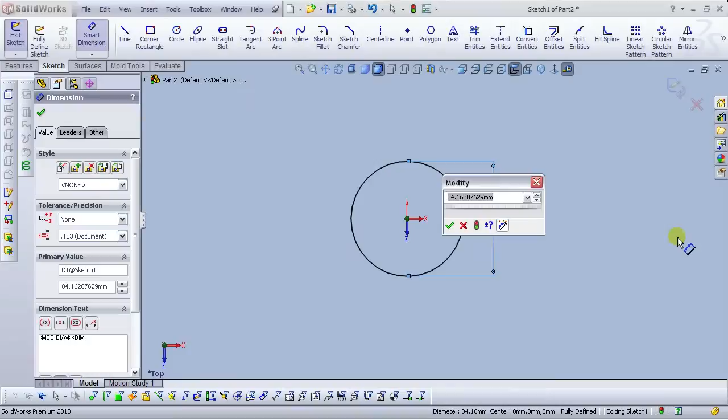Okay, let's start by opening a new document and creating a new sketch. Select the part and select OK. Go to the top plane and open a new sketch. Select the Circle tool and let's draw a circle from the origin. Okay, now let's smart dimension this circle. For diameter, type 70 millimeters.

Go to isometric view and exit the sketch. Go to Extruded Boss/Base. For the depth, type 80 millimeters and select OK. Now let's add a fillet. For the fillet radius, type 5 millimeters, select this edge here and select OK.

Go to the Shell feature. In parameters, for thickness, type 2 millimeters. Select show preview, select this face here and select OK. Okay.

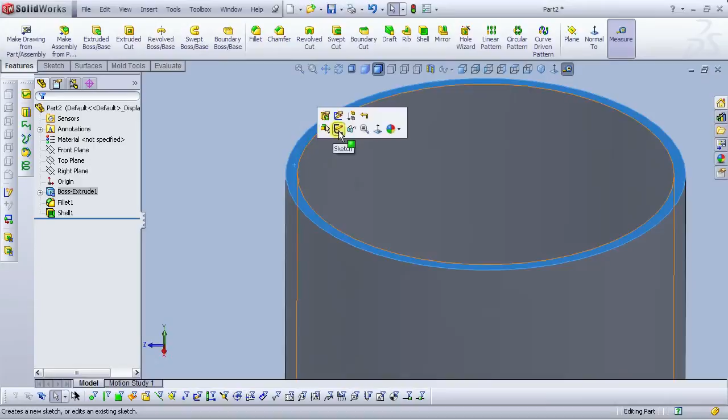Now go to the right plane. But before that, let's open a new sketch. Select this face here and let's open a new sketch. Select circle and from origin let's draw a circle about here. Okay, now let's smart dimension the circle and type 69.5 millimeters. Okay.

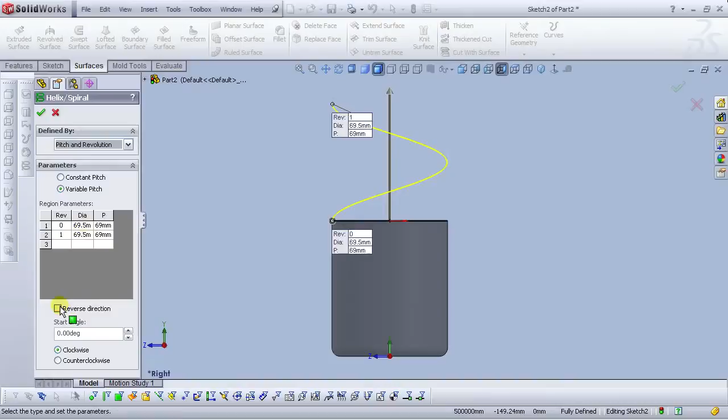Now go to the Surfaces tab, select Curves and go to Helix and Spiral. Go to the right plane. Okay, select variable pitch and pitch and revolution. Okay, select the reverse direction checkbox and for start angle type 0.

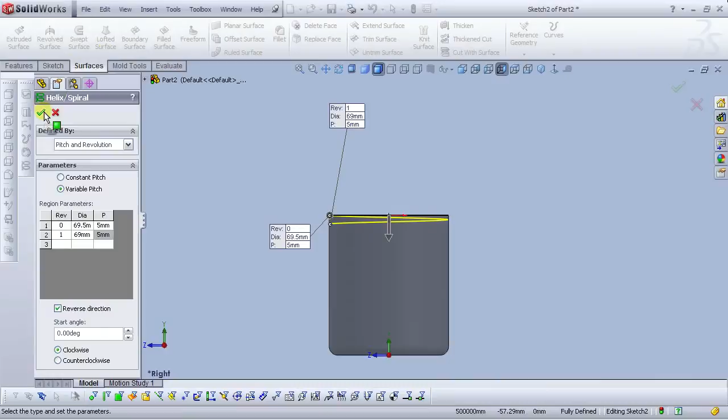Okay, now in parameters, for the pitch type 5. For diameter type 69 in the second row. Okay, and also here type 5. Now it looks good. Okay, and let's select OK to accept. Now we have our spiral.

Go to the right plane. Now let's draw a sketch. Select the right plane and open a new sketch. Let's draw a circle. Let's smart dimension the circle. Type 1 millimeter in diameter. Now let's draw a line from this point here to this point here.

Okay, let's trim. Select the Trim Entities tool, trim this side of the circle and select OK. Now select this point and this helix holding Control and add Pierce. Okay, looks good. Now go to the Features tab and let's exit the sketch.

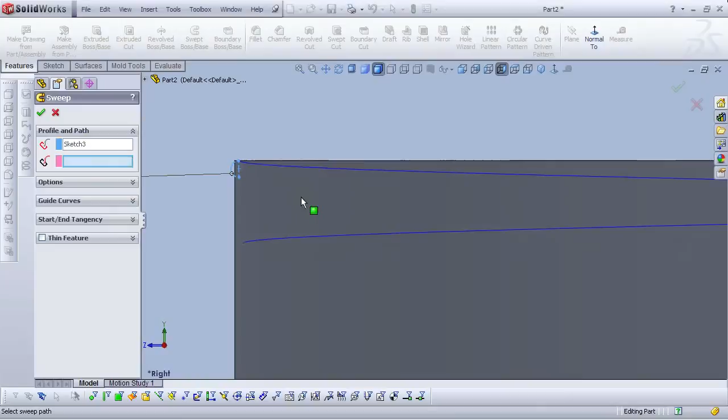Select the Swept Boss/Base command, and for the profile select this sketch number 3, and for the path select the helix. Okay, now we see the preview and select OK.

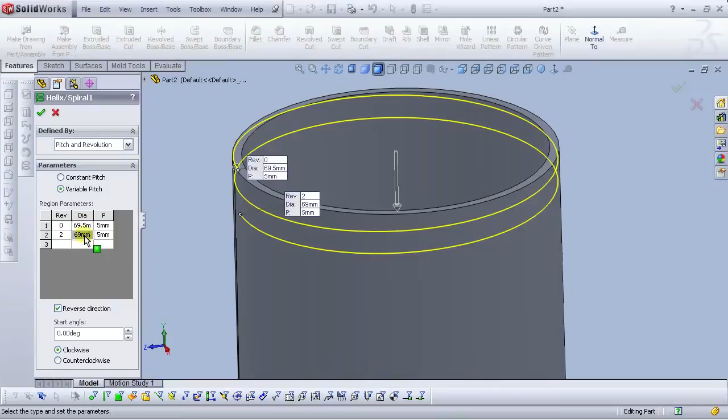Let's edit this feature. To edit, go to Options and select Keep Normal Constant, and select OK. Let's edit the helix. And let's in here, second revolution. OK. Now it looks good, and select OK. Now we have our thread.

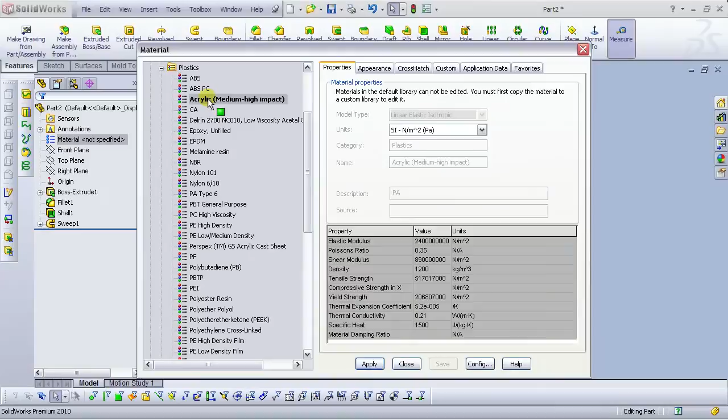OK, go to isometric view. And let's add material. Select material, edit material, and find plastics, and select acrylic medium-high impact. OK, apply and close. Looks good.

Now let's save this part. File, Save As, UV Water Purifier, and for file name type container. And let's save. Okay. Now we are going to use this part to create another one, and that would be a cap for this container. Okay.

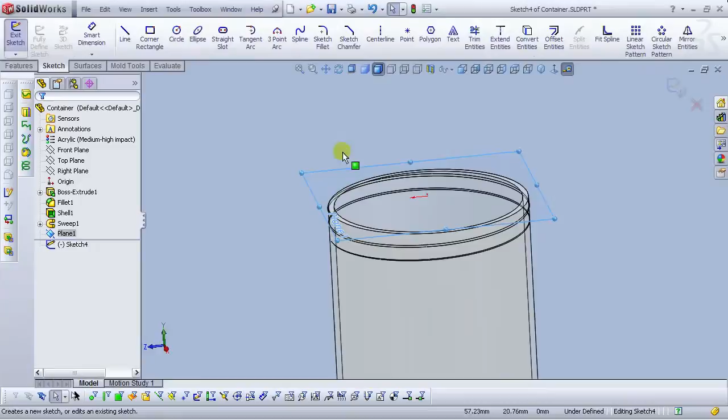Select this face here and select plane. For the distance, type 2 millimeters. Okay, and select OK. Let's open a new sketch on this plane and go to normal to view. Select circle, find the origin, and let's draw a circle. Now let's smart dimension this circle. For dimension, type 72 millimeters.

Go to isometric view, go to the features and let's extrude. Deselect the merge result checkbox and let's change direction, select reverse direction, and for the depth type 15 millimeters and select OK. Let's hide this plane.

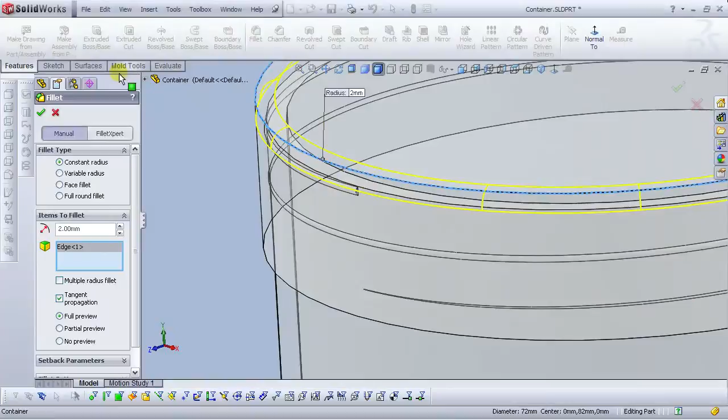Now go to the fillet command, for the radius type 5 millimeters and select this edge here. Let's make this radius smaller. Let's type 2 millimeters. That looks better. OK. And let's select OK. Now let's save this part. File, Save As, type cap. OK.

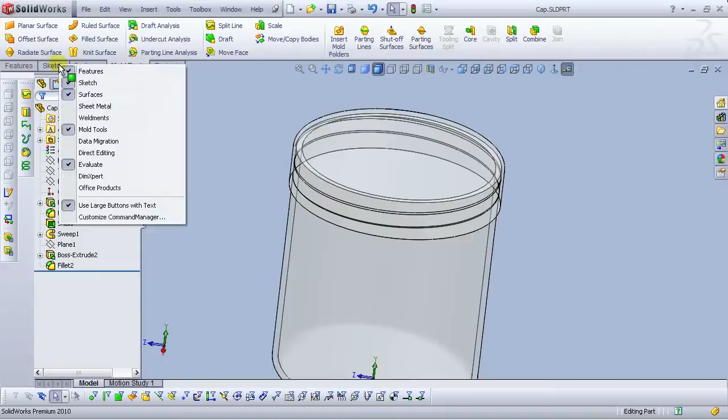Now select the Mold Tools tab. If you don't have a Mold Tools tab, you can select either of these tabs, clicking on your right mouse button, and open the Mold Tools tab. OK. Now select Combine.

For the operation type, we are going to select subtract. For main body, we are going to select this cap. For the bodies to subtract, we are going to select this container. And let's select OK. Now we have our container gone and we have our thread inside this cap. Okay, looks good.

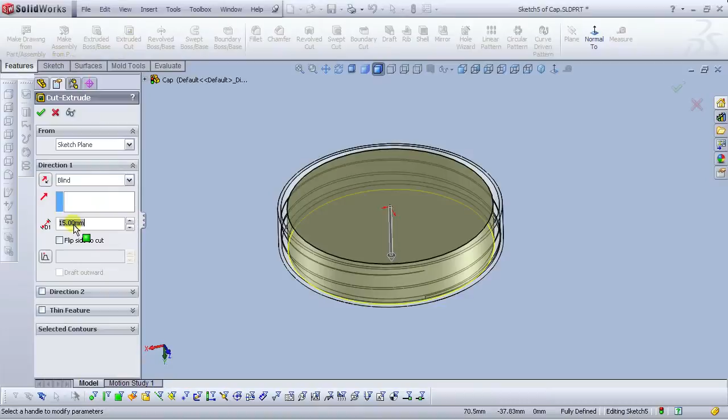Now select this face here and open a new sketch. Select again this face and let's convert entities. Select OK. Go to the Features tab and select the Extruded Cut command. For the end condition, select up to surface, and for the surface, select this surface here and select OK. Now it looks good. Let's rebuild and let's save this part again.

OK. Now let's select this face and open a new sketch. Go to Normal To view. Let's draw a center line from the origin point. OK. And let's draw a circle.

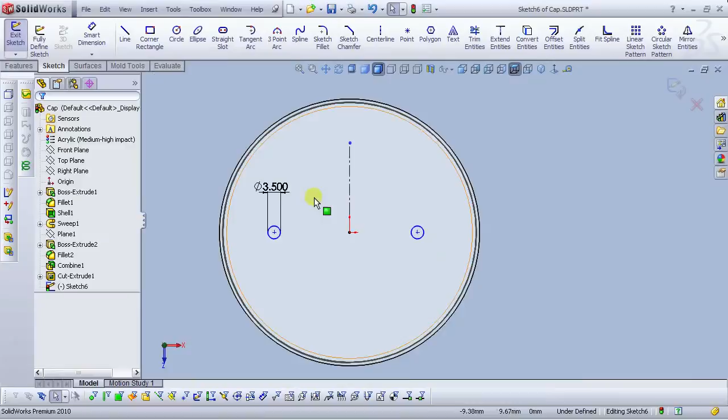Let's Smart Dimension. Type for diameter 3.5 millimeters. And let's select this circle and hold Control and select this circle here, and select Make Equal. Now let's select this point and, holding Control, select this point and this point, and select Make Horizontal. Now select this circle, holding Control select this axis and select this circle here, and make symmetric.

OK. Now let's create a dimension. Select Smart Dimension and type 30 millimeters. OK. Now the sketch is fully defined. Go to Isometric View and let's go to the Features tab and select Extruded Cut. OK. You can type here 10 millimeters and select OK.

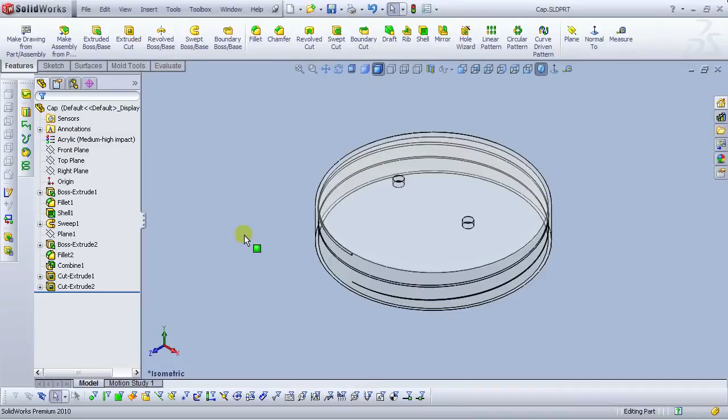We created a hole. Looks good. Let's rebuild this part and let's save. Now let's open a new part. Select the part and OK.

Select top plane and open a new sketch. Let's draw a rectangle. Select corner rectangle tool, and for the rectangle type, select center rectangle. Find the origin and let's draw a rectangle. Let's smart dimension. Let's type 40 millimeters, and for this vertical dimension, type 25 millimeters. OK. Go to isometric view and let's exit the sketch.

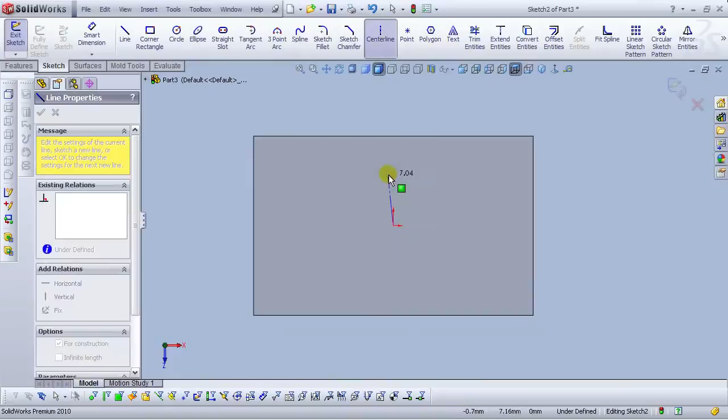Select extrude boss base command and go to zoom to fit. For the depth, type 55 millimeters. Go to zoom to fit and select OK. Now let's select this top face here and open a new sketch. Go to normal to view. Now let's draw a center line. OK. And let's draw a circle.

Now let's smart dimension. Type 4 millimeters in diameter, and also this one 4 millimeters in diameter. Let's select this point and this point, holding Control, of course, and make horizontal. Now let's smart dimension. From this point to this axis, type 10 millimeters, and also 10 millimeters between this point and this second circle. OK.

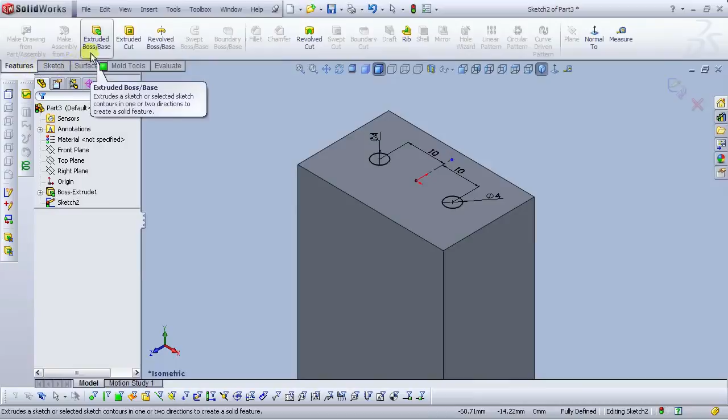Now go to isometric view and go to the Features tab and select Extrude Boss Base. For the depth type 2 millimeters and select OK.

Now let's add some fillets. Type 1 millimeter fillet on this edge here and this edge here. Also on this edge and this edge. And select OK. Now it looks good. OK. Now let's add another fillet. Here, here, here, and here. OK, and select OK.

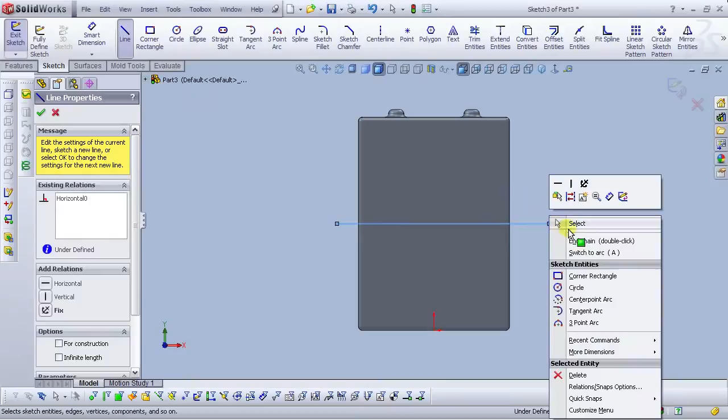Select this face and open a new sketch. Go to normal to view and let's draw a line right about here. OK. Now exit the sketch and go to the Surface tab. In the surface, find Curves and Split Line command. Select Split Line. For type of split, select Intersection

or Projection, better. For the selection, select Sketch 3, and for the faces to split, select this face, this face, this face, this fillet face also, this, and this. OK, and select OK. Now we have split our faces. Now looks good. OK.

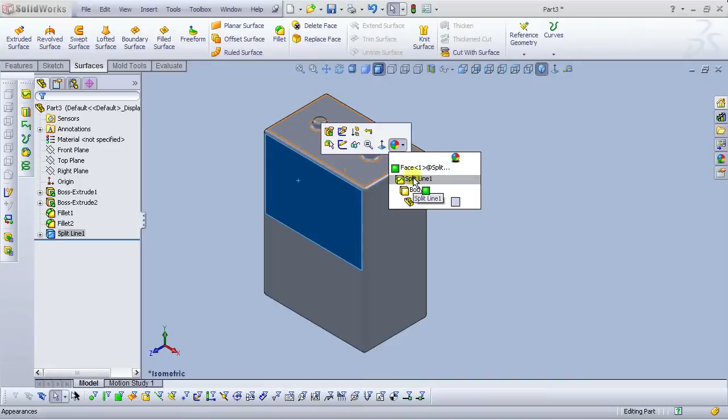Now let's add some colors. Select this face and let's add appearances. Select face and select this color here. Now let's add other faces here. Looks good. Select OK. Now let's select this face here and let's add appearances.

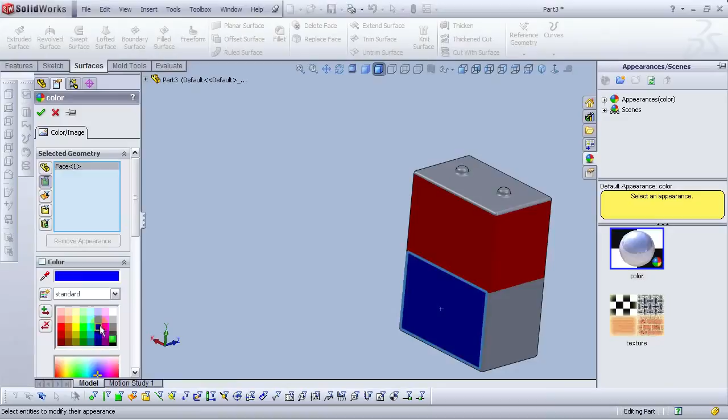Select face, and for select geometry select faces. Okay, we have selected face 1, and select this color here. Select this face, this face, this face, this face, and also this face. Okay, go to the isometric view and select OK.

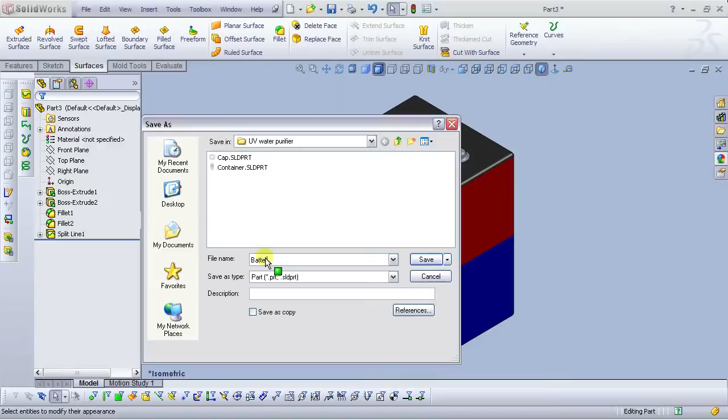Now let's select this face and also add the appearances. Select this color here and these faces. Okay. Go to isometric view and select OK. Let's rebuild and let's save this part. Go to File, Save As. For the file name, type battery. And save.

Now let's open a new document, new part, and select OK. Select the top plane and let's open a new sketch. Select corner rectangle tool and for the rectangle type select center rectangle. Let's draw a rectangle from origin and now let's smart dimension. Type 10 millimeters by 10 millimeters. Okay.

Exit the sketch and go to isometric view. Select Features and Extrude Boss Base. For the depth, type 5 millimeters and select OK.

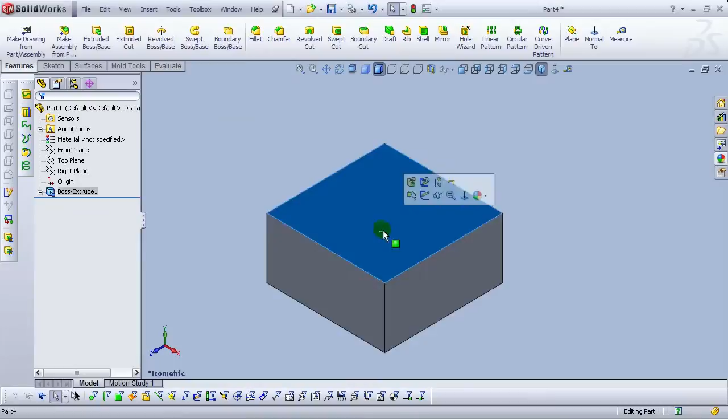Now select this face and let's open a new sketch. Go to normal to view, select circle and let's draw a circle. Now let's smart dimension the circle. Type 3.5 millimeters in diameter. Okay. Go to the features and let's extrude boss base.

Select 2 millimeters, or better 1.5 millimeters. Select OK. Go to the fillet command and select 1 millimeter radius fillet, or 1.5. Okay, now it looks good.

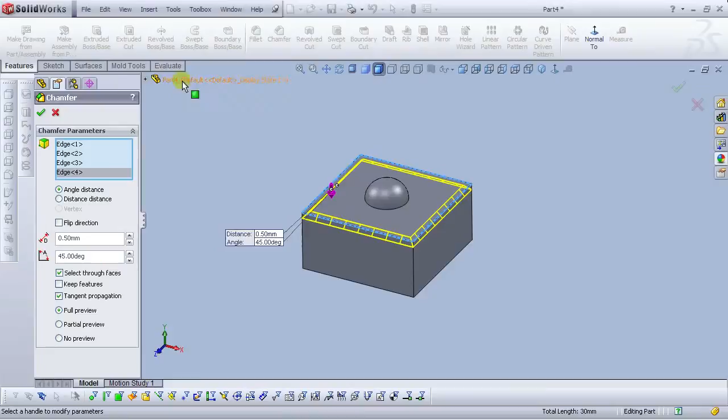Go to the chamfer command and for chamfer type 0.5 millimeter for distance and 45 degrees for angle and select this edge. Okay, and this edge and select OK. Go to isometric view, rebuild. Now let's add some appearances.

Select this boss extrude and select boss extrude 1. Select this color and select OK. Now let's select this chamfer and go to appearances, select chamfer again and select also this color, select OK.

Now let's select this fillet and go to this face 1 and face 2 and select this color here, select OK. Go to the isometric view, rebuild, and let's save this part.

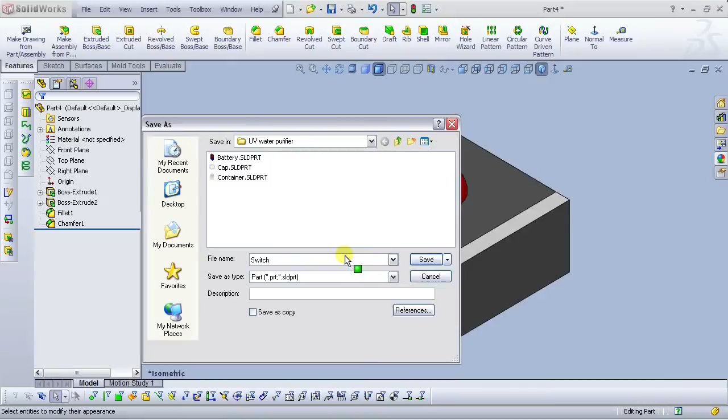File, save as, type switch. OK. Let's save. Now let's exit this part and also this part here and this part here. Now go to the new part and OK.

Go to the top plane and let's open a new sketch. Select a circle and let's draw a circle from origin. Now let's smart dimension the circle. Type 5 millimeters for diameter.

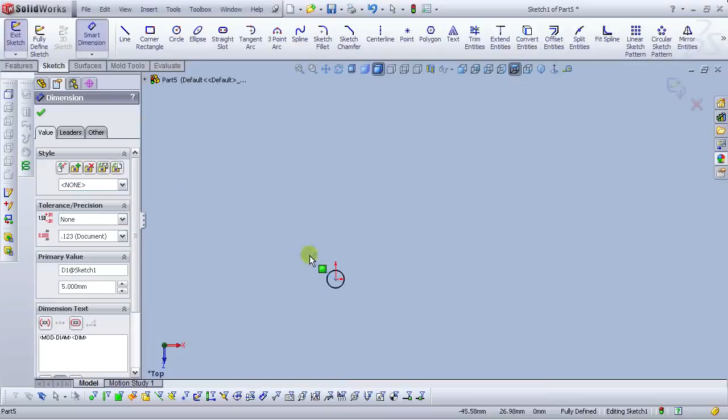Okay, now let's draw a center line from here to here. Let's smart dimension the center line. Type 7 millimeters. Okay, and let's draw a point in the middle. Okay, select. Now go to isometric view and let's exit the sketch. Go to extrude boss base command and for the depth type 7 millimeters and select OK.

Now let's select fillet command and let's add fillet. For the radius type 1.5 millimeters and select this edge here and let's select OK. Looks good. Let's go to the top view. OK.

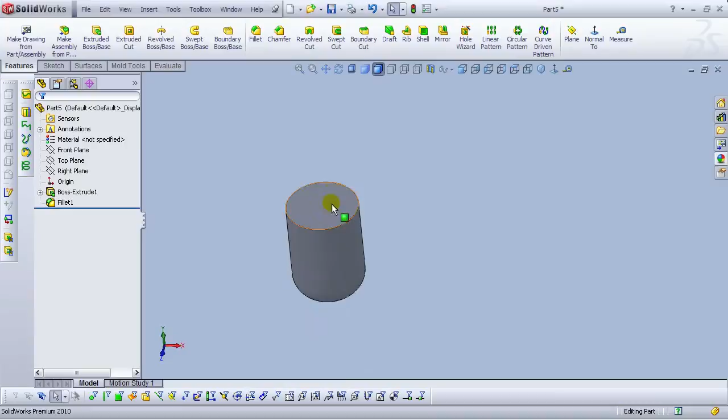Now let's open a new sketch, or add another fillet, but not yet. Okay. Now let's open a new sketch on this face here. Go to normal to view. Let's draw a circle right about here. Let's smart dimension the circle. Type 0.15. Okay.

And let's smart dimension. Type 1.5 millimeters. And let's add relations between this point and this point, make horizontal. Now the sketch is fully defined. And let's exit the sketch.

Now let's draw another sketch on this face. Select a circle right about here. Also let's smart dimension. Type 0.15 millimeters. And let's also add relation vertical and let's smart dimension 1.5 millimeters. Okay.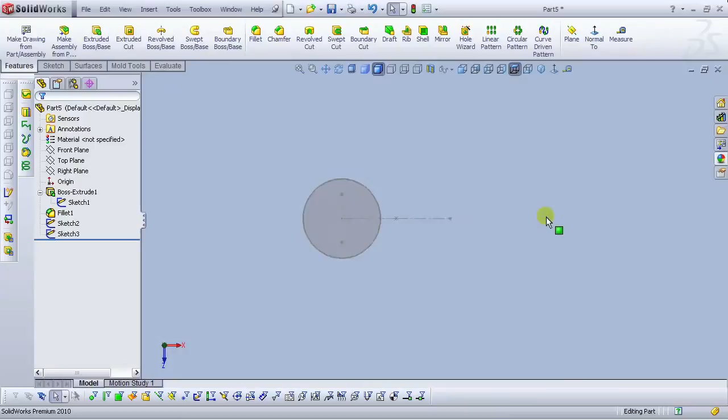Now go to the boss extrude one and let's show this sketch. Okay, go to the isometric view and let's add a plane. Select this point here and let's select this for the second reference. Select this line here and the plane is fully defined. Okay.

Now go to the top plane and let's add plane again. For the first reference, select the front plane. For the distance, type 5 millimeters and select OK.

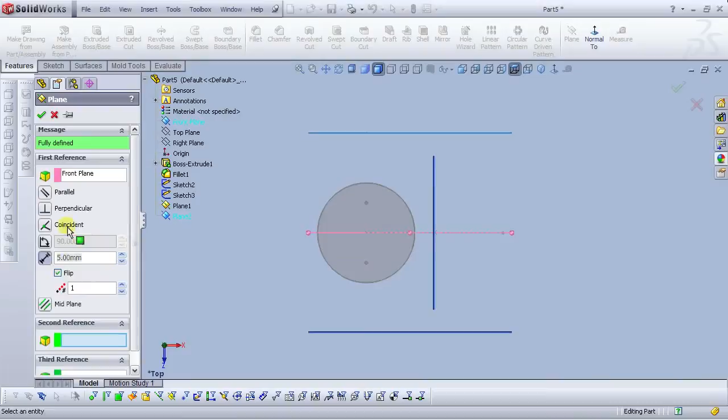And again, select the plane, and for the first reference, select front plane, and let's flip. OK, 5 millimeters also distance, and select OK. Now it looks good.

Now let's hide this plane here and this plane here, plane number 3, and let's open a sketch on this plane. Go to normal to view, draw a center line from this point here. Okay, now let's smart dimension, type 15 millimeters. Okay.

Let's draw a point right about here and let's smart dimension this point, type 1.25 millimeters, and for this distance here type 5 millimeters, and let's draw a point in this end. Okay, now it looks good. Okay, now let's exit the sketch.

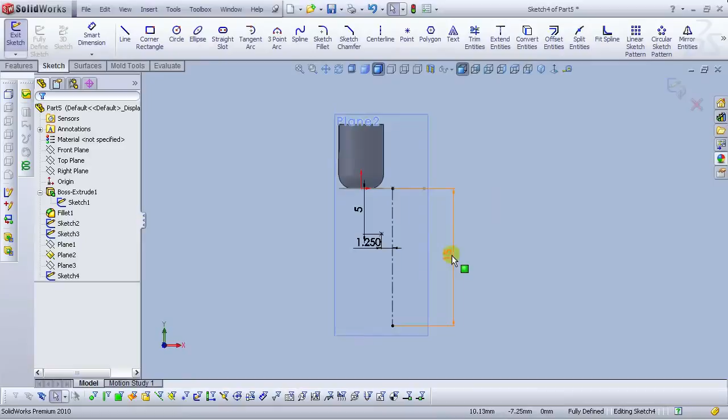Oops, we need to draw this on a different side. Okay, now let's edit the sketch, go to normal to view, and let's edit. Let's start by deleting this dimension. Okay, and let's switch to the other side. Okay, now let's smart dimension and type 15 millimeters.

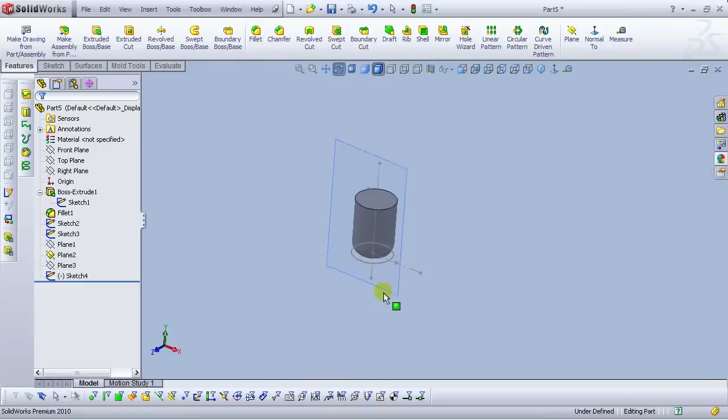And let's, from this, but we need this origin, so we're going to exit the sketch and do another thing. Okay, let's delete the sketch and delete these planes. We're going to do it now in a different way.

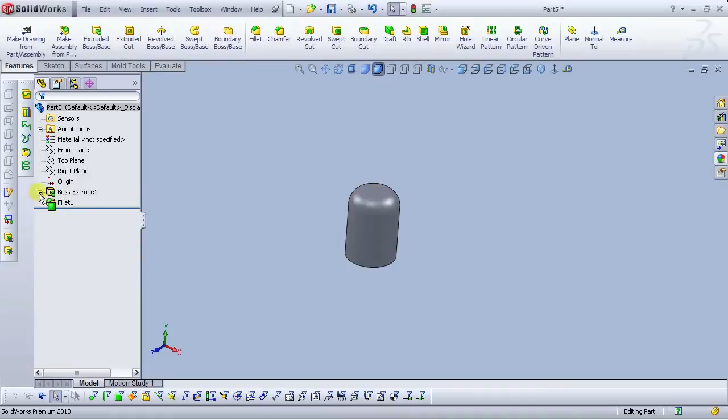Edit fillet. Now let's deselect and select this face here. Select OK. Now it looks good. Now let's select this face here and let's open a new sketch. Let's draw another circle like we drew before. OK.

Now it looks good. Okay, go to the front plane. Now go to the plane, select this. Okay. Now let's make another plane like we did before. 5. Okay. Again. Let's flip. Okay. Let's hide this and this one, and let's open a sketch.

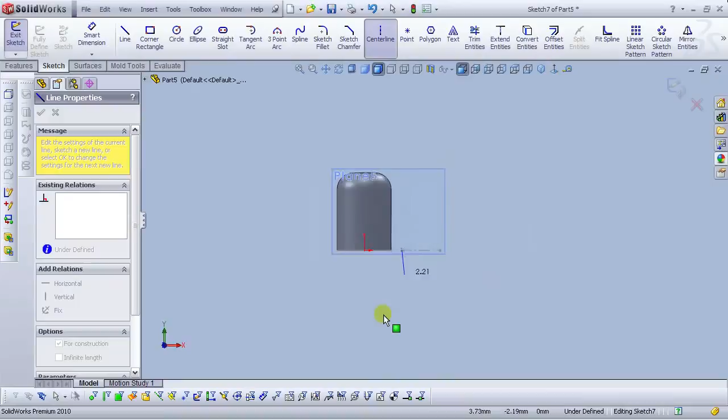Now let's do the same thing, but now we can see our fillets are on the upper side. Okay, and let's smart dimension 15, and let's add a point, and let's smart dimension this point 1.25 millimeters, and for the distance 5 millimeters. Now we are the same like before. Okay, let's exit sketch.

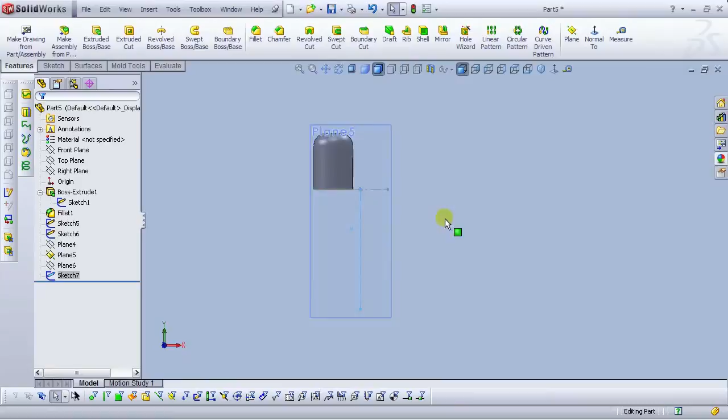And now let's hide this sketch and go to the sketch tab, and let's create a 3D sketch. Select line and select the center of this circle. Now select this point here and select this bottom point here. Okay, go to normal to the front view, and it looks good, and exit the sketch.

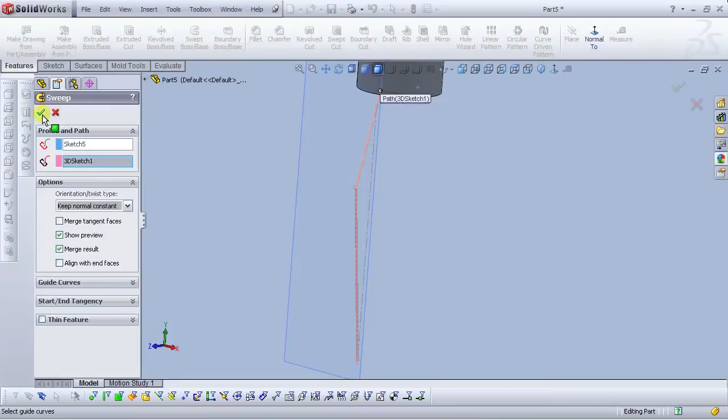Go to the Features tab and select Swept Boss/Base. For the profile, select this circle, and for the path, select this line. Okay. For path, select Keep Normal Constant, and select OK. Looks good.

Now let's hide this plane here, and let's show another plane. Plane number 6. Show. Let's open a sketch on this plane also. Go to normal to view. Okay. Now let's convert entities. Okay, and let's make this construction geometry. Select a point right about here, and let's smart dimension this point from this to this point here. Type 3 millimeters.

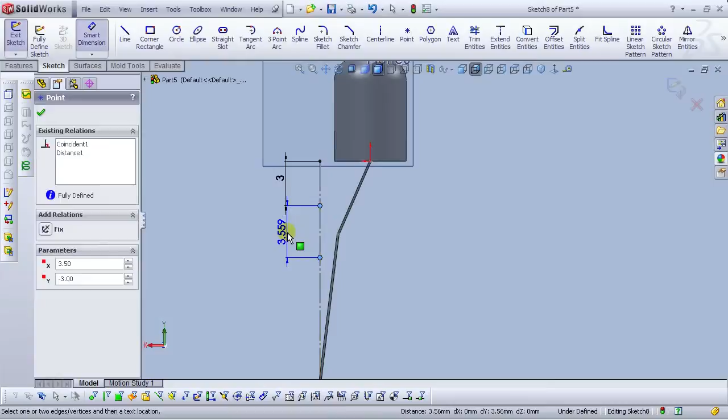Okay, and let's add another point right about here. Okay, let's smart dimension 3.5 millimeters. Okay, now let's exit the sketch. Let's go to Sketch tab and let's create a 3D sketch. Select line and let's find the center point of this circle. Now let's draw a line to this point here. Go to the front view or back view, it's better. Okay, and select this point here.

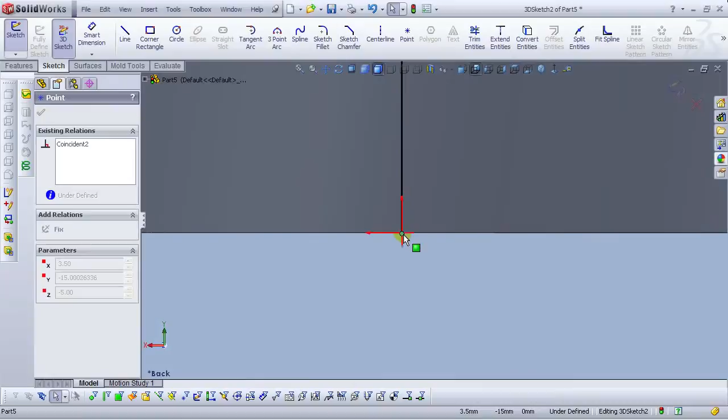Make constant. Okay, let's delete these relations and let's move it right about here. Okay, let's exit the sketch and let's edit the sketch here. Edit sketch and let's add a point right here. Okay, oops, let's delete and exit the sketch. Go to 3D sketch. Okay, now it looks good.

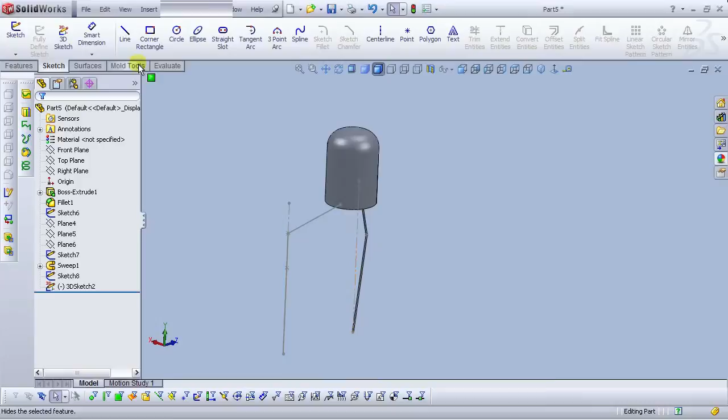And let's edit the sketch. Let's hide this plane and go to the Features tab and select Swept Boss/Base. Select this circle here for the profile and also this one for the path, and let's open the options and select Keep Normal Constant and select OK. Now it looks good.

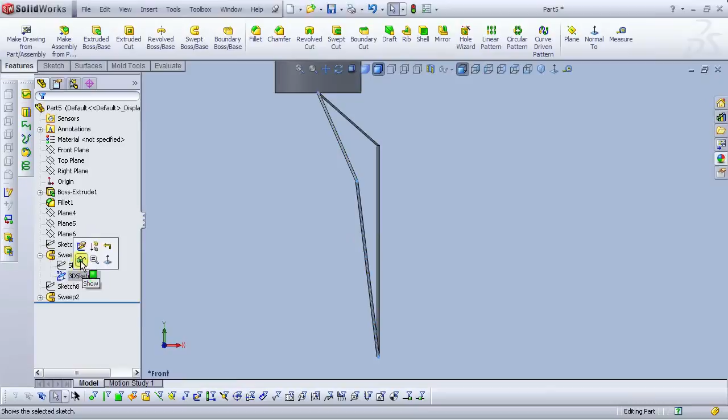Okay, let's hide this sketch and go to the front view. Also let's hide this. Okay, and let's show this 3D sketch and select plane number 5 and let's show. And now let's open a new sketch on this plane. Go to normal to view.

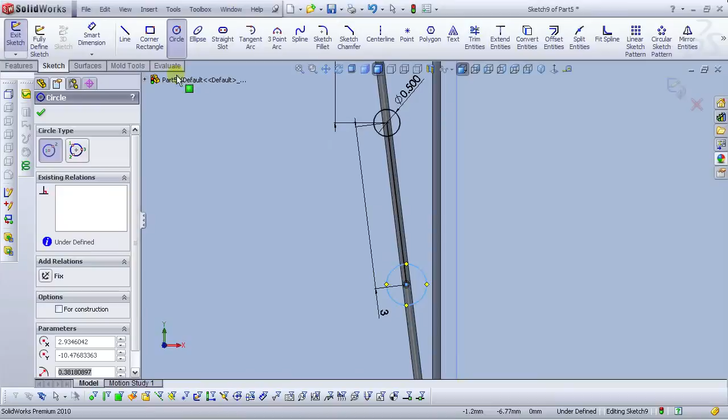And let's draw a line. Let's draw a line from this center line from the previous sketch. Okay, now let's smart dimension this line. Type 3 millimeters. Okay, and from this point to this point type 2.5 millimeters. Okay, now let's draw a circle from this point. For the circle diameter, let's type 0.5 millimeters and also right about here 0.5 millimeters.

Okay, now let's draw another circle and let's smart dimension. Type 15 millimeters in diameter and let's move it right about here. Okay. Now let's select this circle and this bigger circle holding control and make it tangent. Also let's do that on the other side. Okay. Let's try to change this dimension to 1. No, it's better to be 0.5. Okay. Now let's trim.

Okay. And let's select extend entities and let's extend this line here and extend this line to here. Okay. Now let's trim. Trim this side here, this side also, and this side also. Okay. Now let's smart dimension again from this point to this point. Okay, and this dimension here. Okay, now it looks good.

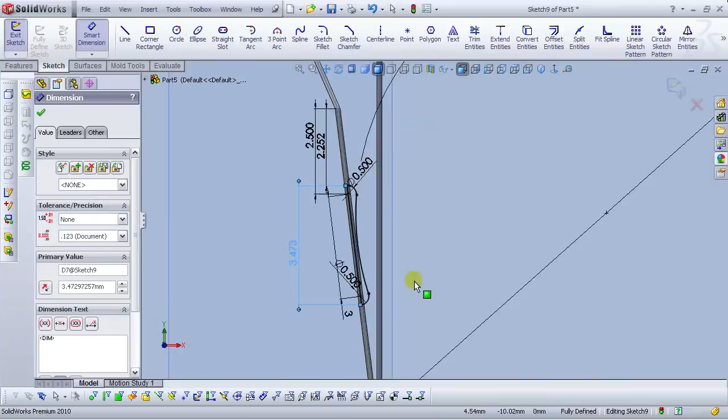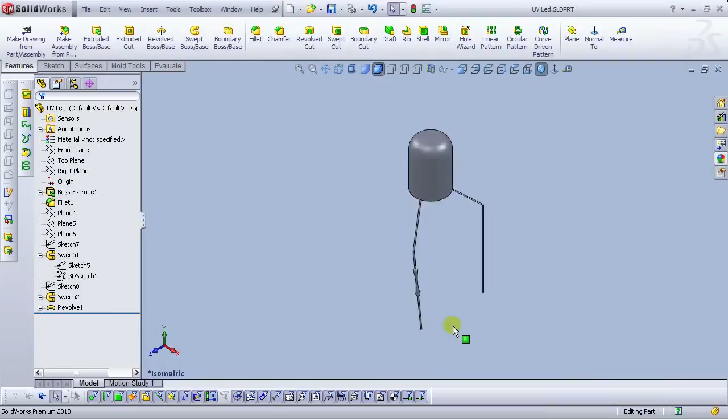File, save as UV LED. Save. Okay. Now let us continue. Go to fillet and 0.2 millimeters. Add fillet right about here. Okay.

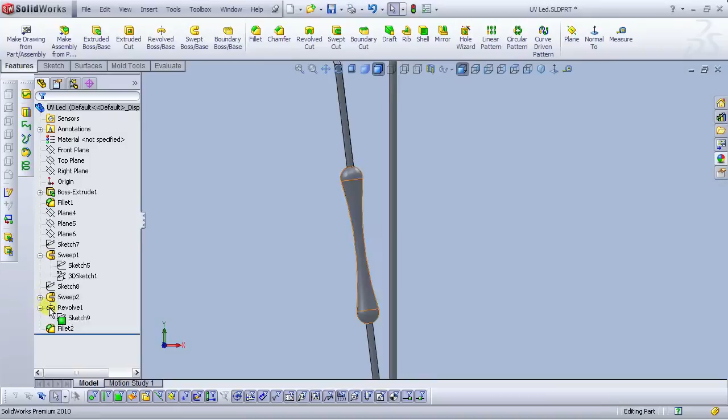Now go to the plane, but before that, let's open this sketch 9 in revolve feature. Go to normal to view and let's add a point in the middle of this line. Okay, and let's exit the sketch. Now let's show that sketch again in revolve 1, show, and go to the plane and select this point here and this line, and let's make a plane. Okay.

Now go to the surface and select curves and select split line. For the type of split, select intersection. For the selections, splitting bodies, faces, planes, select the plane 7. Okay, and for the faces bodies, select this face here. We can see the preview of the split and select OK. Let's hide this plane. Now we have split our face into two. Okay. Now again let's hide this sketch 9. Okay.

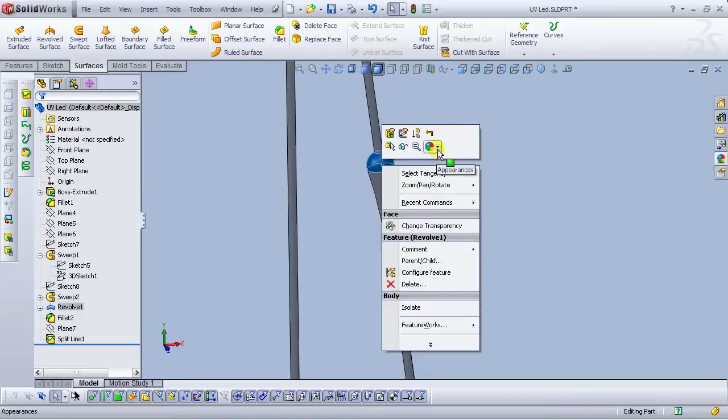And let's add some appearances. Select this face here and select add appearances for this face, select this color, and for this face select this color also, and select OK. Now let's select this face here. Select this color. OK. And for this face here, select another color. This one here. Select OK. Now it looks good. OK.

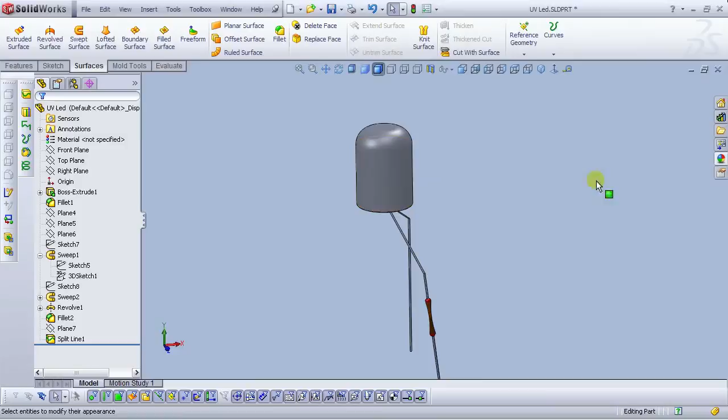Let's go to appearances, scene, appearances, color. Let's select lights. Select LED, blue LED, and let's select this body, this face. Okay, let's do it again. LED, blue, fillet, face, face, and this face also. Okay, we have our blue LED.

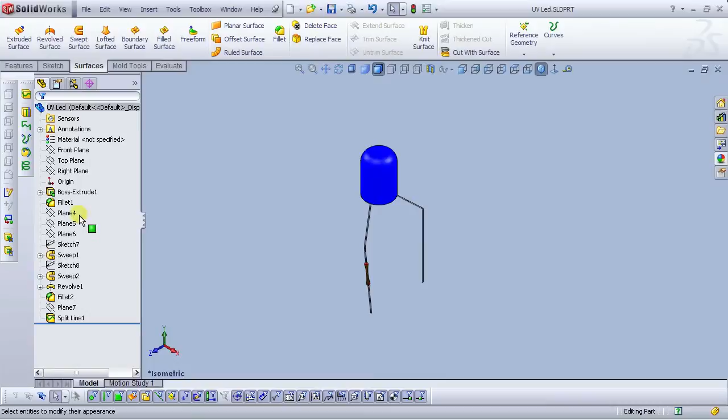Let's show this LED, and let's go to the isometric view, and let's rebuild and then save. Okay, now it looks good. Now let's select the plane 4 and let's show. Go to features and select mirror command. For the mirror face plane, select plane 4 and deselect features and open bodies to mirror. For bodies to mirror, select this body here. Okay, and select OK. This looks good. Let's hide this plane. Go to the isometric view, rebuild, and let's save.

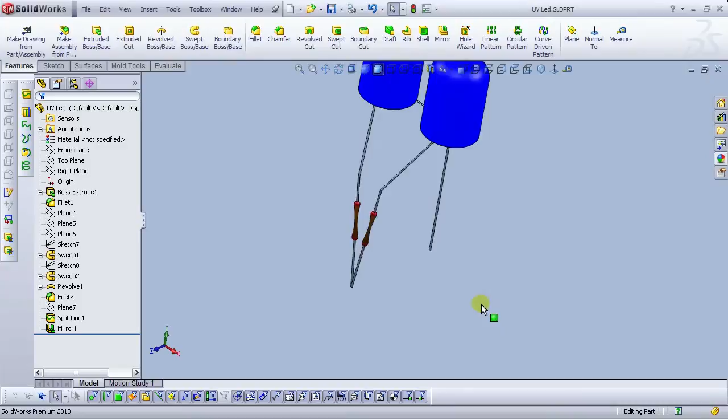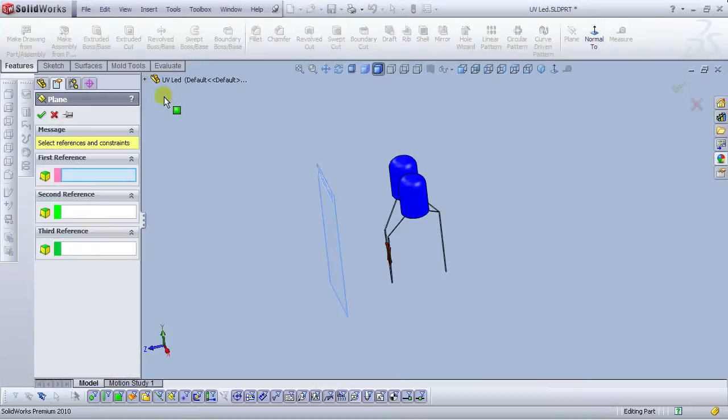Now we have two UV LEDs with their resistors combined in this point here, and this is anodes and this side is cathodes. Okay, now let's continue. Let's cancel this for now. Okay, let's create a new plane, front plane, and let's select front plane, and for the distance type 15 millimeters. Okay, and select OK. Let's select again front plane, plane, flip, 15 millimeter distance. OK.

Now let's hide plane 9 and let's open a sketch in plane 8. Go to normal to view. Okay, now let's draw a point right about here. Okay, and let's smart dimension point from here to here. Type 10 millimeters. Okay, and let's draw another point from here to here, and also let's smart dimension, and let's type 60 millimeters. Okay.

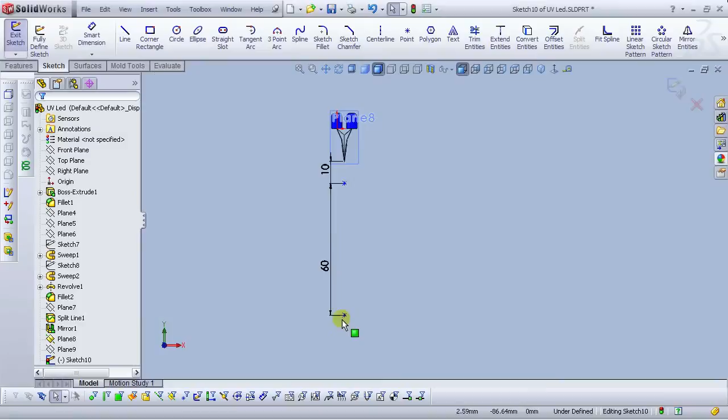And let's make these two points vertical. Okay, and also let's make vertical with this point here. Okay, now those points are fully defined. Let's go to isometric view and let's exit the sketch. Let's hide this plane for now. Okay, and let's open a new sketch on this face here. Open a sketch and let's draw a circle from this center. Okay, let's dimension the circle and let's type 1 millimeter in diameter. Okay, and let's fix this circle.

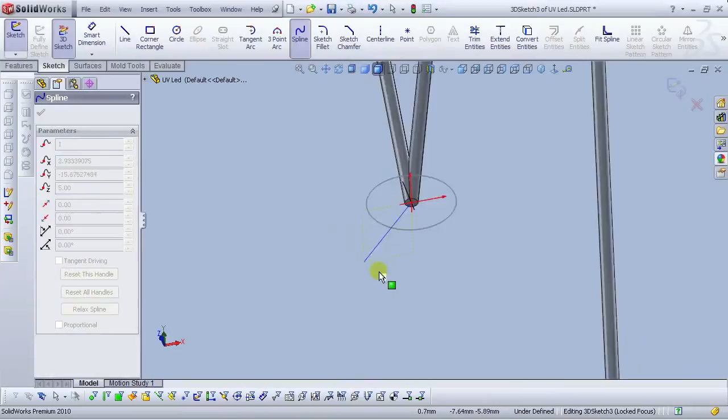Okay, now exit the sketch and let's go to the sketch tab, select 3D sketch and select spline tool, and let's draw a spline from this center of this circle. Okay, go to the front plane and the right plane. Okay, and let's draw a spline to this point, from this point to this point here. Okay, right about here, and let's select this spline.

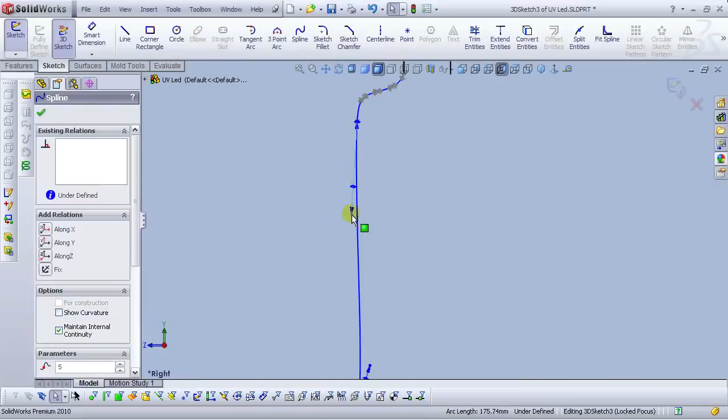Now let's edit this spline by selecting the spline, and let's find these arrows. Let's move it right about here. Okay, and this arrow also, make it more vertical. Okay, you see these spline handles. Now it looks good. So this one, and let's make this one here. Okay, now it looks good, and let's exit the sketch.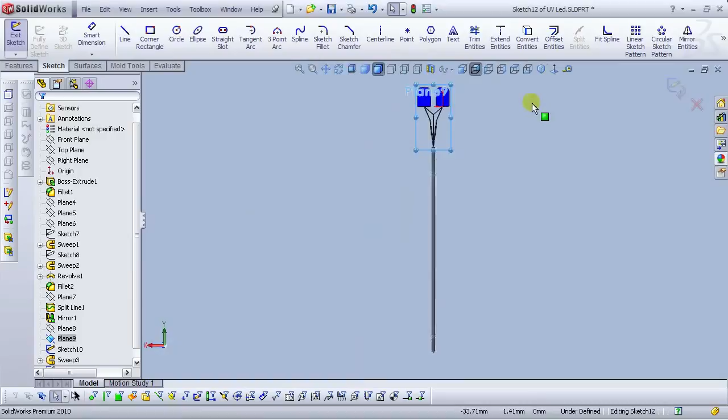Go to the features and go to the swept boss/base. For the profile, select this circle, and for the path, select this spline. Okay, now it looks good, and select OK. Okay, now select the plane 9 and open a sketch. Go to normal to view again. Okay, right about here, and let's draw a point.

Right about here, let's draw a point, and right about here. Okay, select. Let's dimension this point from here, from this edge here, this edge here, 10.5.

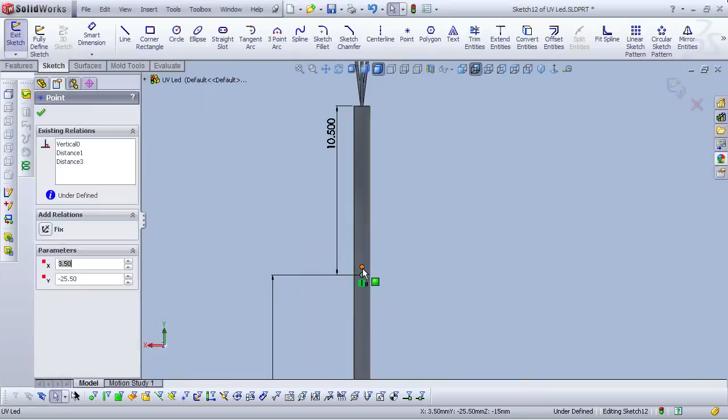Okay, and from point to point, type 58. Okay, and let's make it vertical, and let's make it vertical with this point from the previous sketch. Okay, now the sketch is fully defined. Go to the isometric view and exit the sketch.

Now let's select this face here and open a new sketch. Let's draw a circle. Find the center of this face and let's draw a circle. Now let's smart dimension. For diameter, type 1 millimeter and exit the sketch. Okay, let's slightly rotate. Okay, oops, go to front view, isometric view.

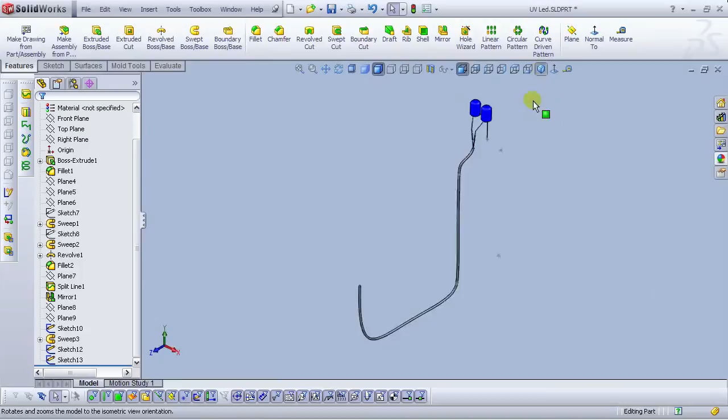Now select the sketch, 3D sketch, and let's draw a spline. Go to the right view and select, hit the up arrow key on your keyboard. Okay, and select this center here, and then hit down. Okay.

Okay, and let's draw a spline. This point and to this point here. Right about here, here, here, and here. Okay. Now let's edit this spline by spline handles. Right about here. Okay. It looks good.

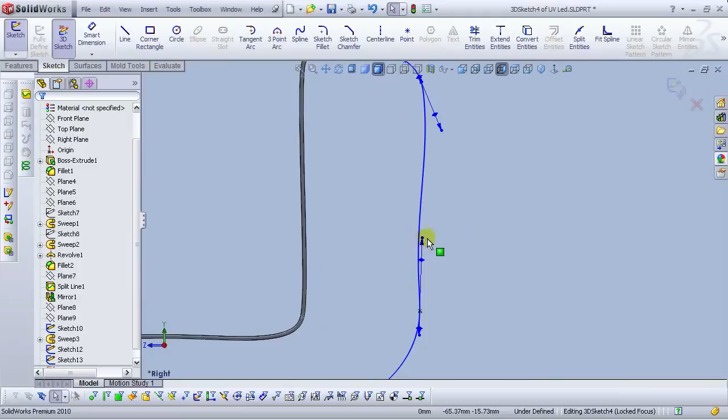And this end here also. Okay. Now let's smart dimension. Type 20 millimeters and go to the right view. Okay, looks good. Let's exit the sketch.

Now let's go to Features tab and select Swept Boss/Base. In the profile, select this sketch of the circle, and for the path, select this spline. OK, and select OK. Go to isometric view. Now we have our wires. OK. Now let's hide this sketch. Go to the rebuild and let's save. OK.

Now let's add some colors. Select this and let's go to appearances, and for this sweep select color of the red, select OK, and for this wire select the blue, select OK. Go to isometric view, rebuild, and save. Now we have completed our UV LED with wires and resistors in one part.

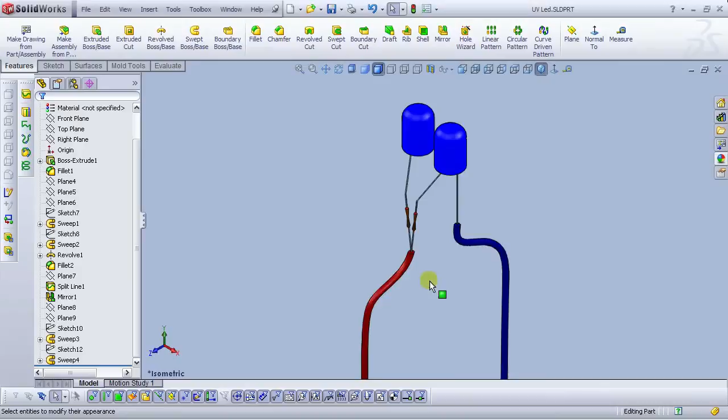OK. Now let's open a new assembly. Select assembly and select OK. In assembly, select browse and select part for files of type. Now let's select container and select this button, keep visible. OK, container. Let's browse again, select cap. OK, browse, select switch. OK, browse, select battery. OK, browse and select UV LED. OK, and select OK.

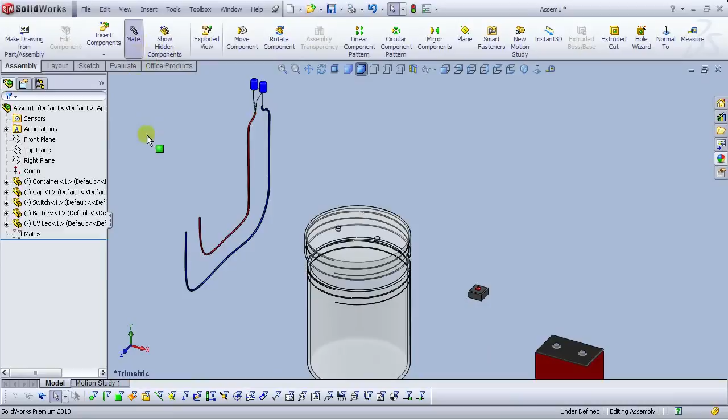Now let's add some mates in this assembly. Select mate and select this face here and this face here, concentric. OK, go to front view, and let's select this edge here and this face here, and select OK. Go to the isometric view and select OK.

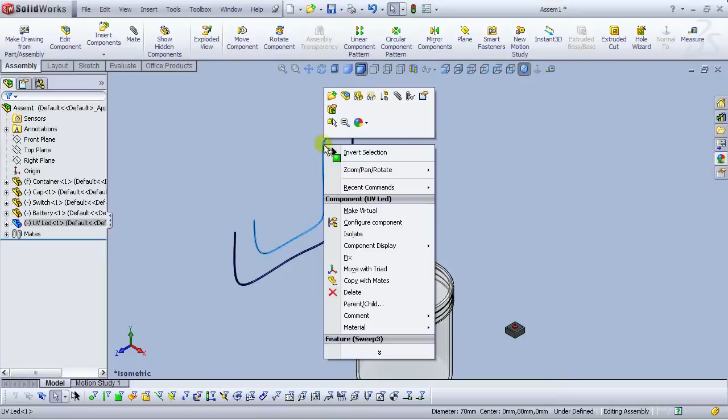Now let's flip this. Select this part and with your right mouse button go to move with triad. Select the center of the triad and again right mouse button and show rotate. Let's rotate it about Z axis by 180 degrees. Okay. Go to front view.

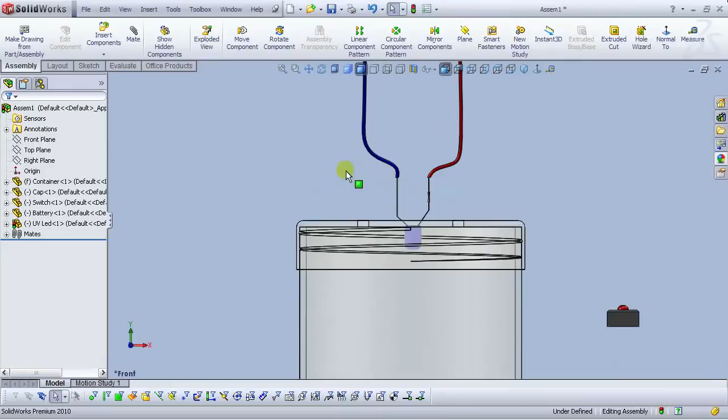Now let's rotate it again. Rotate it about y-axis by 90 degrees. Okay, now it looks good. Go to the top plane and let's slightly move it in this position here. Okay, go to the front plane and let's move it right about here. Okay.

Let's try to mate this. Go to mate, open assembly 1 and select container. Select the front plane and now open the UV LED and select, just about to see, select plane 4. Okay, make coincident. Now it looks good and select OK. Go to the front view. Now we can see our container with LEDs inside.

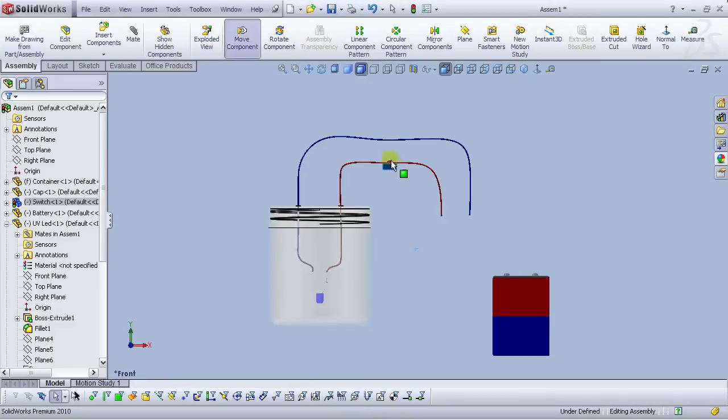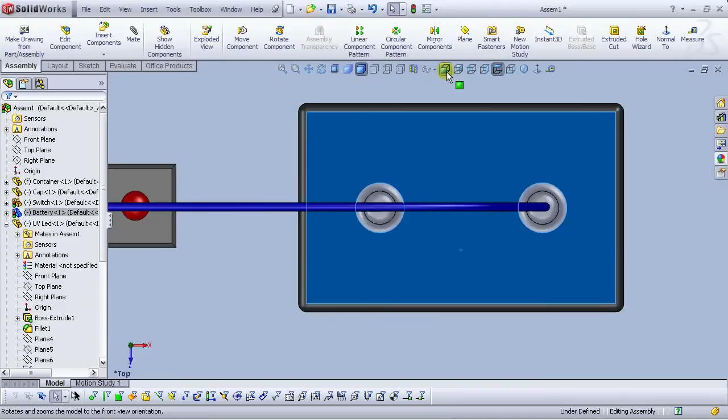Okay, go to front plane and let's move this right about here. Okay, go to the top plane and let's move it right about here and go to the isometric and it looks good. Go to rebuild and let's save this assembly.

File, save as, type UV water purifier. UV water purifier. Okay, and let's save. Now we have completed the assembly of the UV water purifier,

and let's do some rendering. Go to add-ins, options, add-ins, add PhotoWorks and select OK. Now go to PhotoWorks and select Render.